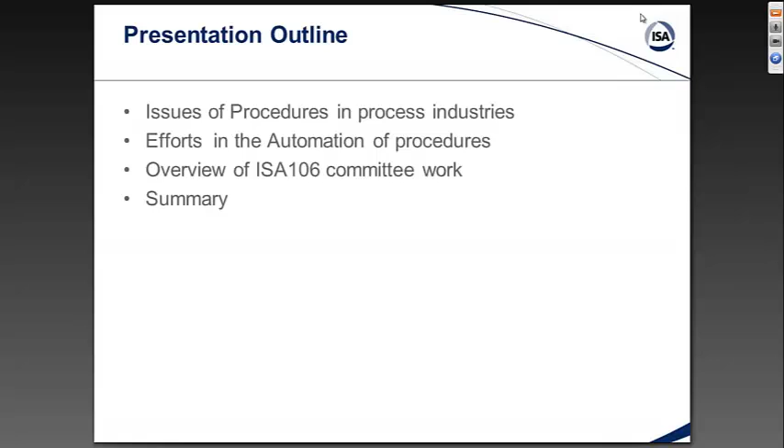There's a number of drivers that create this case for change in our industry. Among those are the large population of operators that are retiring. It depends on what process plant, but a lot of our units require 5 or 7 years for an operator to get board qualified, because they need to spend enough time running the process to create a dynamic mental model. And frankly, we're not replenishing those people as fast as we're losing them. So that's a threat to all of us. Next slide.

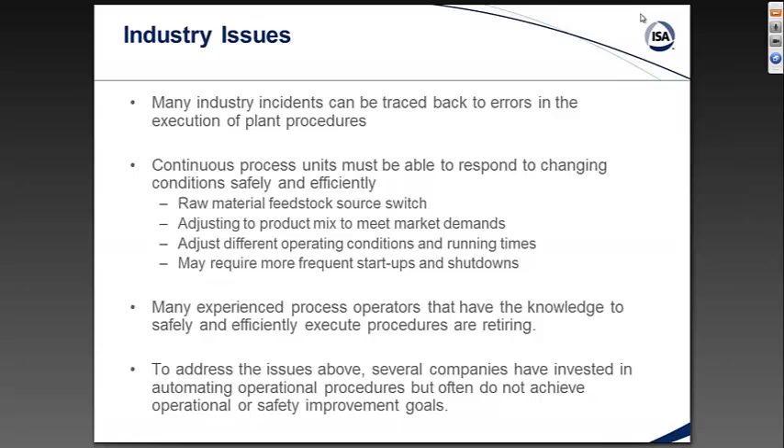Additionally, a lot of errors and fatalities and catastrophes have been linked back to failure to follow procedures, as well as some of the gaps that were built in when automation was deployed. We're hoping to address that with this standard as well.

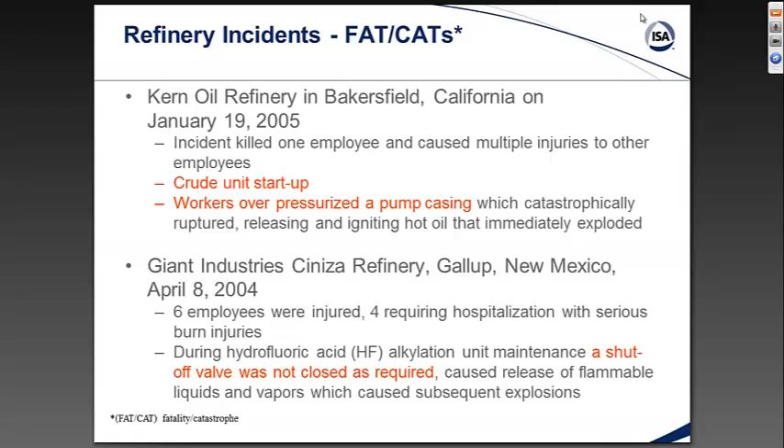Next slide. So here's a couple of examples of refinery incidents. You don't have to be a highly hazardous industry in order to have incidents. It just means that a highly hazardous one's going to be more flashy, more dangerous. But anytime you have an abnormal event or an unplanned event, and it's not what you wanted to happen, right? This is an opportunity to do that a little bit more robustly. Next slide.

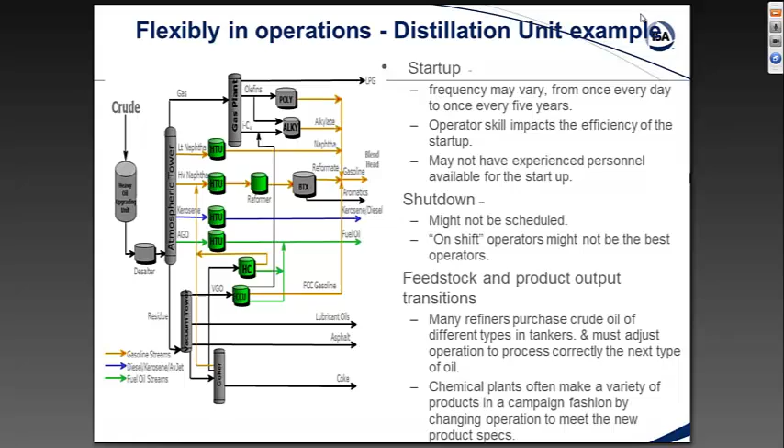Next slide. So here we're talking about skills leaving the workforce. A major refining company lost 2500 years of experience when they had 100 operators all retire about the same time. We hire them in batches, and it turns out then they retire in batches, so that's not terribly surprising. Another major chemical company analyzed their demographics and realized that 75% of their operating staff was going to retire by the end of the decade. So that's a scary thought when you recognize that, and you also know that it takes 5 or 7 years for an operator to really get competent, not necessarily best on the board, but competent at being a board operator.

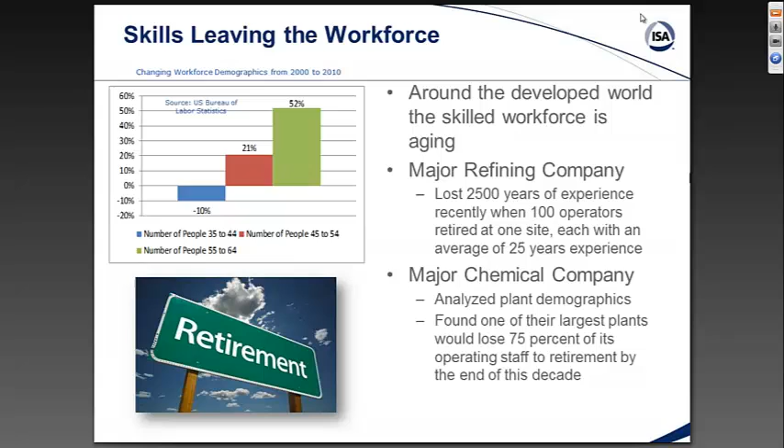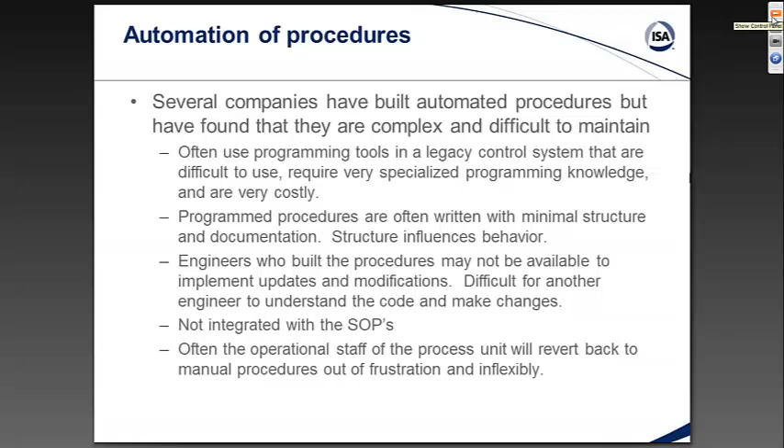Next slide. So several companies have made efforts at automating procedures. There's been a lot of efforts, usually driven by an individual champion within the company, and oftentimes those were too complex or unwieldy to be maintained, sometimes too expensive to do it that way. So this was another justification for why we all got together to make a committee.

Go ahead, next one. Uh-oh, we're hung up. Doesn't want to advance. So, all right, where's my paper copy? Sorry about the technical difficulties there, guys. Just tell them it's not advancing. For those of you online, the slides are not advancing, so we're working on that, but I'm going to go ahead and continue through the presentation, and we'll refresh the screen when we can.

So the ISA 106 committee recently completed the first of 3 technical reports. That's available at isa.org/standards. The second technical report that we're working on is the automated procedure lifecycle. Everybody who's in automation as a career knows about lifecycle management. And the third is going to be basically an appendix, a book of examples on how to apply. After these technical reports are issued and we get feedback from all of you guys, then we'll go about the work of creating a standard. So it starts with these 3 technical reports, gather the feedback on each one, and then move on into a standard.

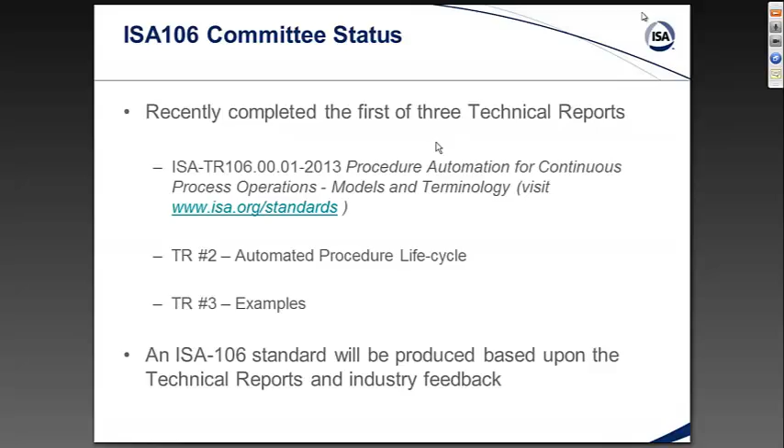So the models and terminology is the first technical report. This is the committee's current thinking on how to organize and approach procedural automation. Part of the reason why some previous efforts to automate procedures were frustrated is that you really need to structure your code properly, because if you just pile it on an existing architecture, it gets very complex very quickly. So the way you model the automation solutions needs to have some rationale behind it, right? It can't just be convenience of the programmer.

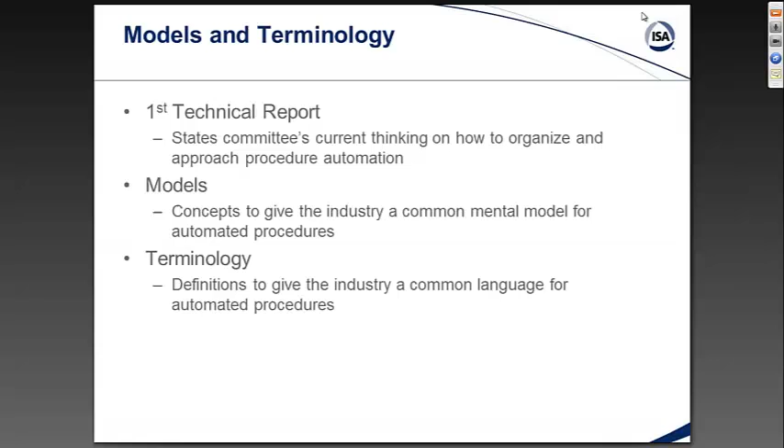I think you skipped one on me. Okay, I see.

So when we're talking about process states, procedural automation is centered on the major pieces of physical equipment, conceptualizing the unit operations in the field. If you build a software model or a state machine that conceptually or virtually reflects that model in the field, we found that's an approach that scales up pretty well and is maintainable. That's some of the structure of the code I was describing a minute ago. And then, of course, all pieces of equipment, all unit operations are going to have a startup function, shutdown, transitions, and the possibility of abnormal situations. So when you structure your object model with a state machine, you take those procedural steps into account.

So this is so-called state-based control, right? Part of what we did is we came up with the physical model. I'm not going to read that to you, but the device, equipment, and unit steps are probably the most important for building your architecture. The plant area just naturally falls out after you put those blocks together.

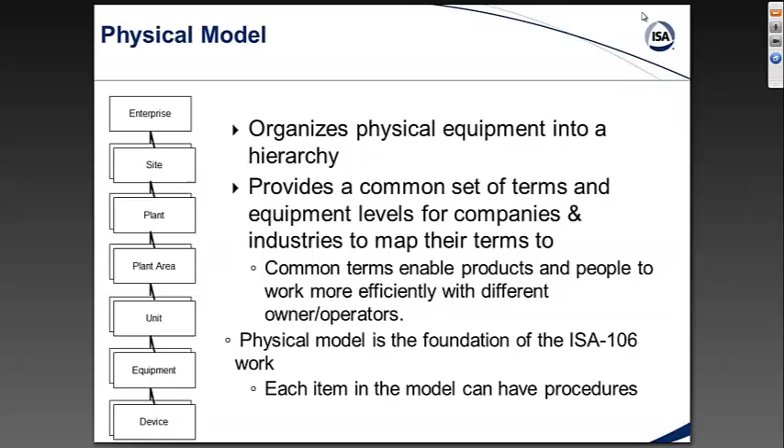Most commonly, we'll build state machines for state-based control at the unit operation level. Sometimes you may have a state machine at an equipment level if you've got dual pumps or multiple pumps that you want to facilitate operation of, but typically it's at the unit level. Next slide.

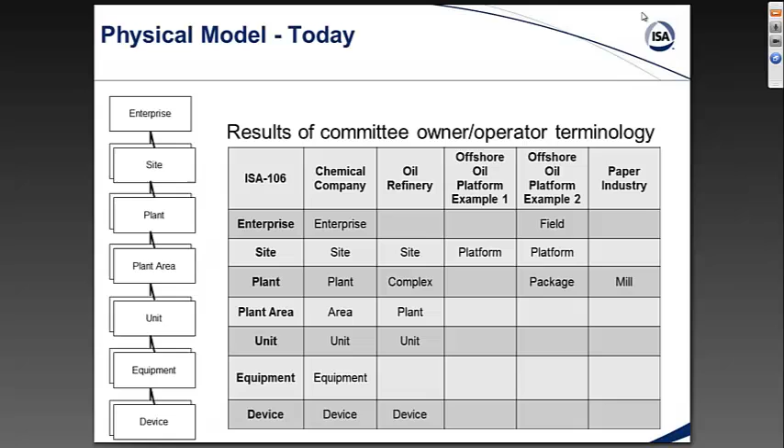So this is an example of mapping these concepts to different industries. Next slide. And again, those are examples of mapping the concept.

So one of the challenges when we work in these ISA standards committees is that we all use the same words for different things, and we don't always recognize that when we're speaking with each other. I'm saying state and you're thinking mode, and we don't know we're not on the same definition. That's why all of our standards have 40 pages in the front end of definitions.

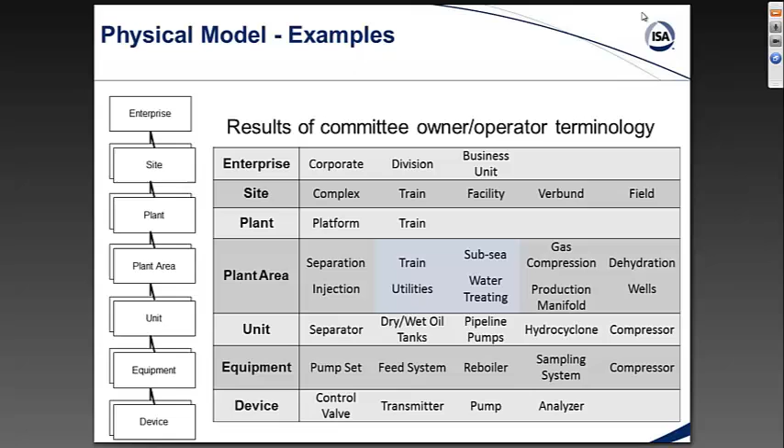Next slide. So we're going to jump into an example of an ethylene furnace. Go ahead, next. So the plant area is the group of furnaces. The units is each individual furnace. Next.

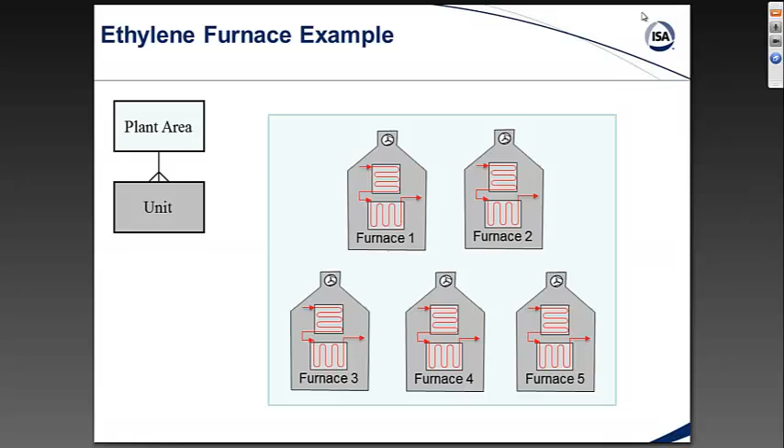And then, of course, within the furnace example, you've got all of the components. So what we're going to do when we build an object model or a state machine model, a unit model, is collect all of the I/O associated with that unit operation, and all of those are rationalized, as well as all of your alarms. Because we took into account 18.2, your alarm rationalization happens on the front end, so you don't have nearly as much load on the back end of rationalizing alarms. So alarms are part of your I/O from that point of view, and you collect these and group them.

I'm not going to get into too much detail on how you actually break it into subcomponents, but basically you take the sand and the straw and make bricks, and you build your components out of bricks, your walls and buildings out of bricks, instead of trying to build them out of sand. You take the smaller pieces, make bigger pieces, and those are the pieces you work with. Next.

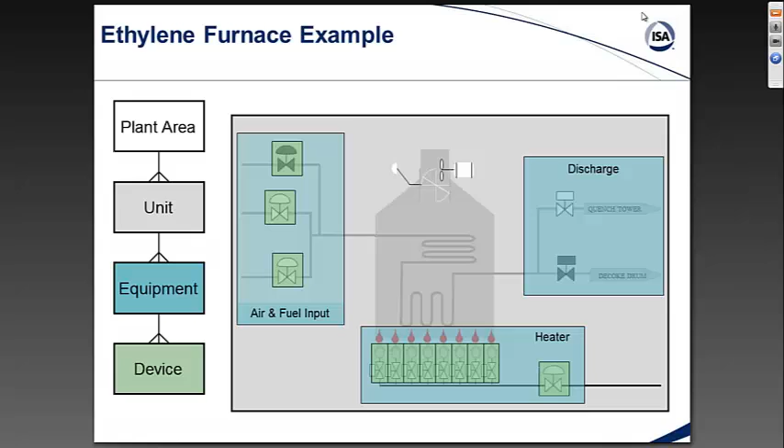So this is really just a definition of what those different physical terminologies are: device, equipment, unit, plant, area. So the definition of a procedure—you'd be amazed how much time we spent talking about the definition of procedure in the committee meetings. A lot of us, I don't know if anybody here is from Exxon, but you know how Exxon likes to say 'process' instead of 'process'—we all emphasize things so we know we're talking about different things, but that's only if you're part of the clique.

So we spent a lot of time talking about a procedure because, if you back up, you say, well, a procedure is anything that you do in the same way, right? Maybe you have a procedure for going from home to work. And we had to all get on the same page about that. So we defined procedure, because if you're going to say procedural automation, you need to define your words.

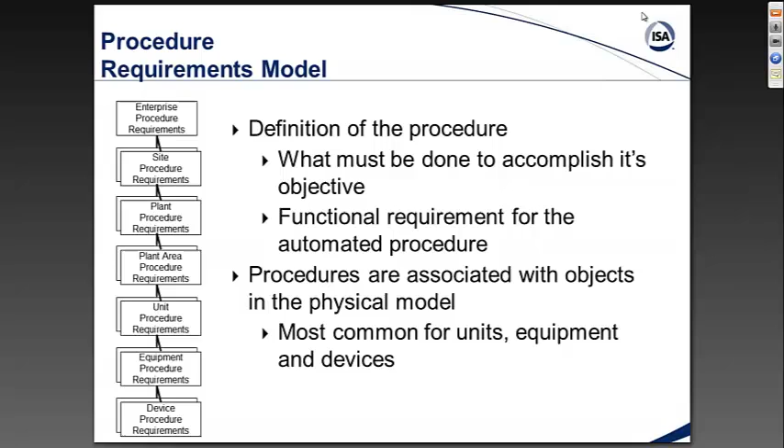So procedures are associated with objects in the physical model. So you don't necessarily have a plant procedure. And the way I find useful to think of that is, not necessarily to define the procedure concept by the written document, because there's so much variation on how we all do that, but from the operator's point of view, what is the procedure that the operator's going through? And sometimes, depending on how you manage your paperwork, that's more than one document. For them to do the thing they're trying to do is the procedure with reference to the physical object model.

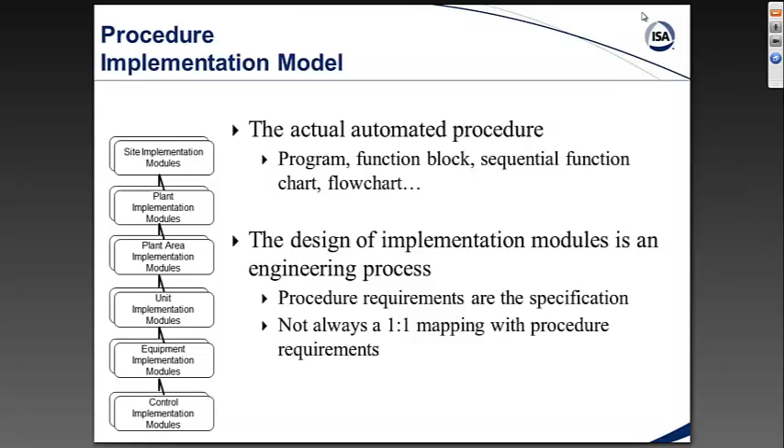Next. So this is sort of what I described about the procedure and getting into the operator point of view to delineate what's the procedure for that unit operation.

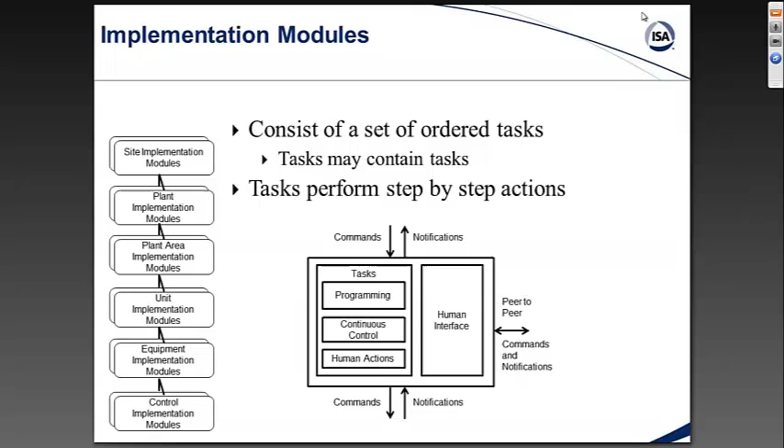Next. So here, a procedure in this case might have more than one implementation module and multiple tasks. And where you draw that box when you're segmenting your plant, it's heavily influenced by the operator's point of view, and it's heavily influenced by the physical model.

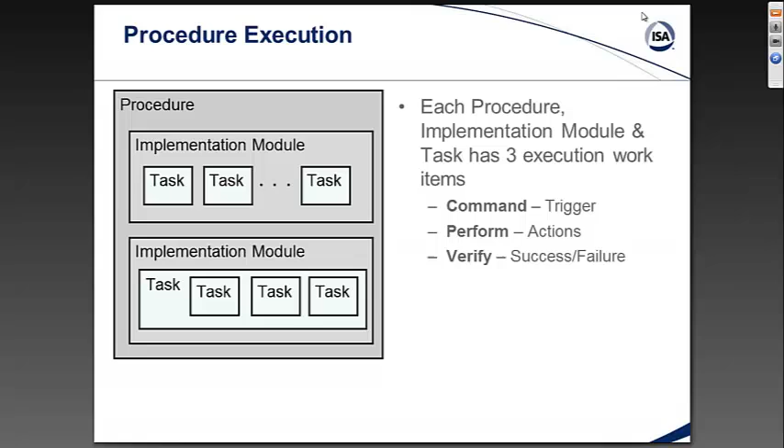So one of the things that you look for is patterns in your P&IDs, because you're going to create coding efficiencies. So if all of your tanks have a single pump and they have the same valve configuration with a recycle or a minimum flow orifice, then that might be something that you describe as a convenient sized brick or object to use. And then when you're working with operators to gather their knowledge, you talk about how they interact with this. This is going to be a unit.

Next. So command, perform, verify is very important, and it's not as important, frankly, whether it's command, perform, verify or command, verify, perform. But the idea here is the operator issues the command, and before you put energy into the system, whether that's start the pump or introduce steam or whatever the energy is to the system for that unit operation, you verify that everything is as intended.

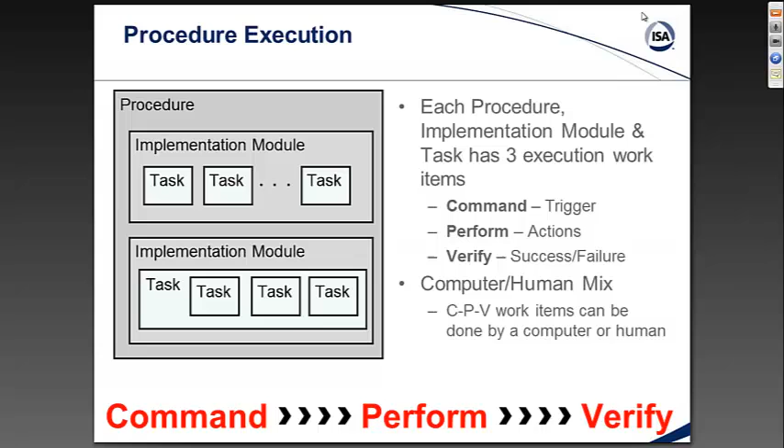So this means that you make good use of your instrument failure detection, make good use of your limit switches. If your valves are not lined up, if your pump discharge valve is not open, it's probably not a good time to start the pump. But the reason I said sometimes you need to switch the perform and verify is sometimes you need to put energy into the system to verify that everything's okay. And that's fine, you do that by exception.

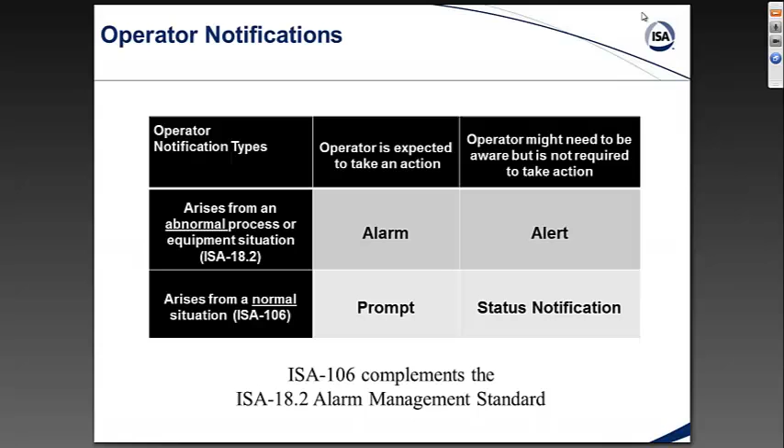So again, talking about alarm management, rationalizing alarms on the front end saves so much time and makes such happier operators. And you need to, when implementing 106, have a process for collecting that information and then deploying it into the code so that you don't end up with, after the project started up, this list of chattering alarms that somebody could say you should have known about going in, but we didn't code for it going in.

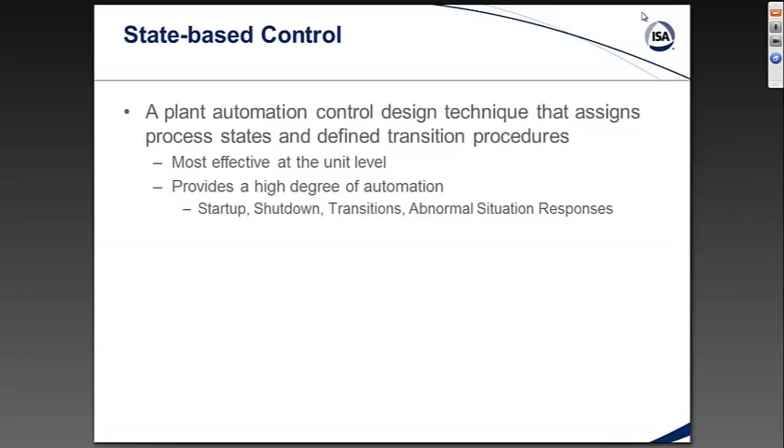So a plant automation design technique that assigns process states defined and defines transition procedures - that's really a restating of what I was talking about. But we use some common approaches that we've found useful: startup, shutdown transitions, abnormal situations.

And this is not new technology. A lot of companies have been deploying this very successfully for a lot of years. And there's data showing the value is there, so I'm not trying to sell you on it. I'm just trying to let you know this is not a pipe dream. This is not vaporware.

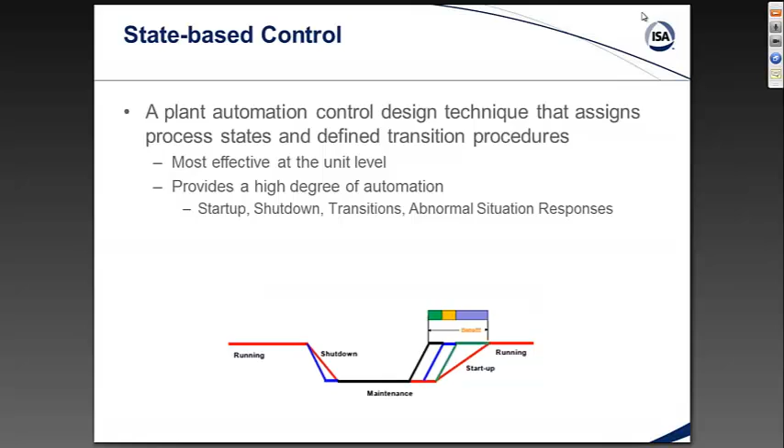Next. So here's a quick state-based control example. I'll let you guys go ahead and read that.

One of the things that you did not hear me talk about much is abnormal condition handling. So depending on the complexity as well as the hazard of the process that you're trying to set up, you may want to build in specific abnormal condition handling, and that can be event driven or state driven or both. But that's one of the big benefits that we see in taking this approach.

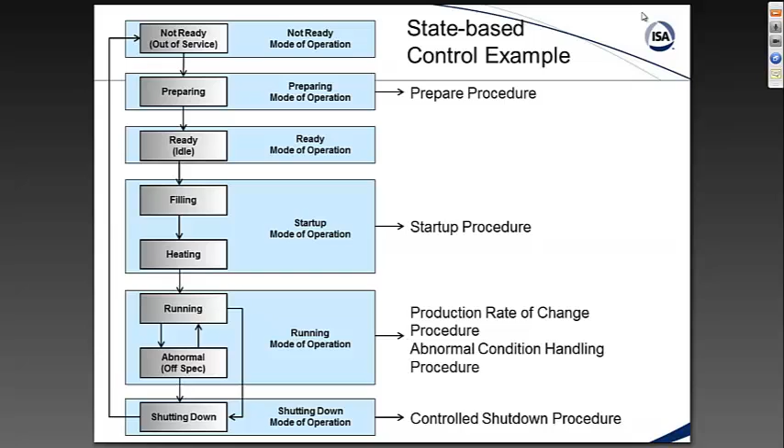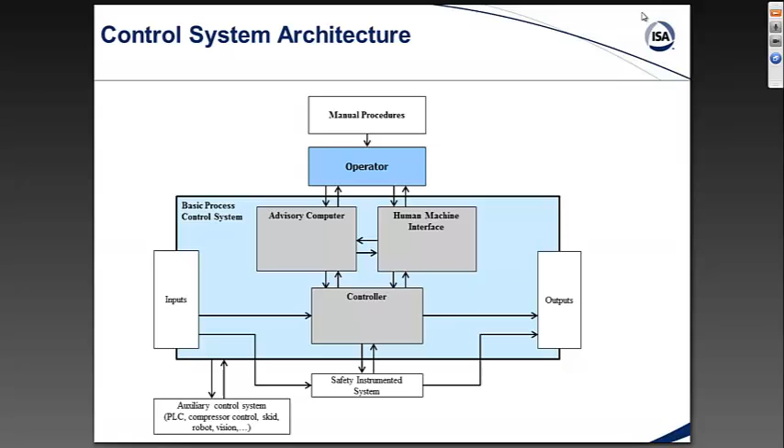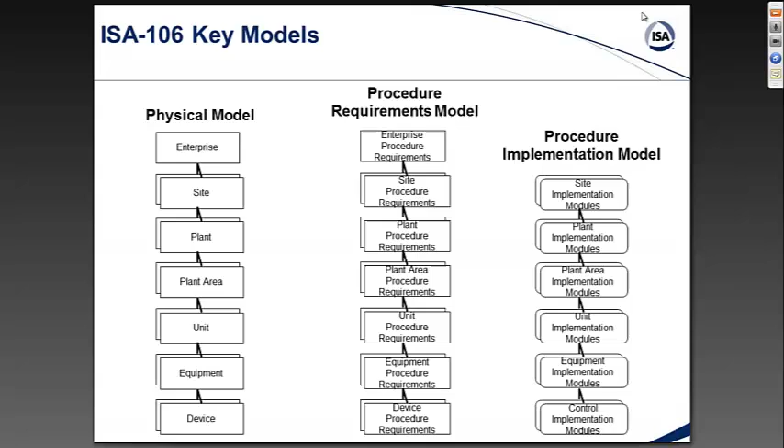Successful execution and management helps to get us to the point of more safe, more reliable operations more reliably. The ISA 106 committee continues to work on this. We finished one technical report. Not to sound like I'm whining, but it's amazing how much work it is to put these things together. So when somebody asks you to be on one of these committees, please do it, but also recognize it is a commitment.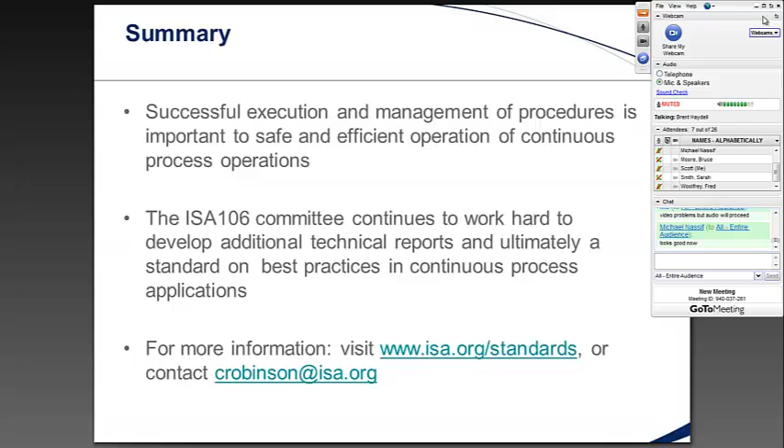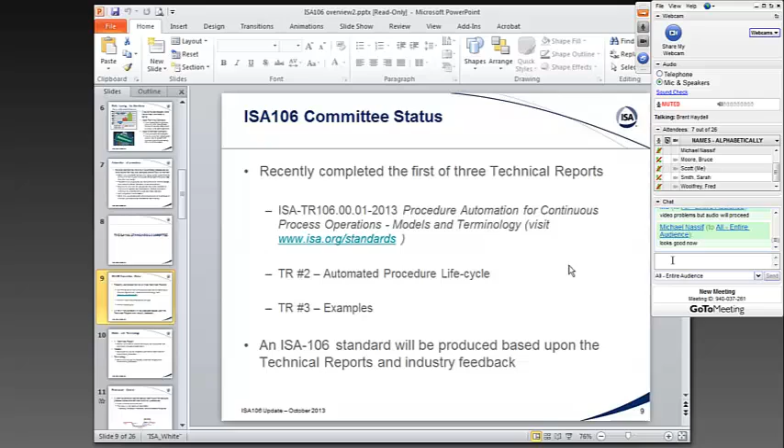Okay, can you hear me? Okay, come on over here. We're going to change the format of the meeting a little bit, so now we're going to do an informal interview. I'm going to talk to August for a bit. If you have questions, submit them to Brent through chat if you're online, or write them on paper if you're here. Think of Brent as Roz from Frasier, he'll be the screener keeping things moving. Anyway, August, thank you for agreeing to do this presentation. I really appreciate it. Thanks for having me, I think it was really informative.

So you talked a lot about the model and the way things are put together, which is kind of the first step to get everybody in agreement. But I kind of felt like you don't have to have the model. I've seen this done in a few places, like in a DCS for a major chemical company, and also Triconex uses this for their compressors. They roll through different steps, and in Triconex, basically where you are is just an integer in a register. If you're in startup it's 1, then 2, then 3. So they don't really have all that built out. Do you think this model's really that important?

I do. I think they're leaving something on the table by not establishing that cognitive model, to be honest with you. Not every implementation of a sequential function chart is the same as what we're describing. Building that object model and conceptualizing it from the operator's point of view pays dividends. There's been a lot of research since about 1988 on operator cognitive models, and one thing we've learned is that even operators in the same unit, say an ethylene unit, who got the same training and went through the same creation of their cognitive model, will experience different things throughout their years. Even if they see a very similar event, ethylene plants are complex, so it depends on what you're looking at when that happens and how they're going to learn. Humans learn by updating cognitive models, that's how you know where your bumper is even though you can't see it when you're driving your car.